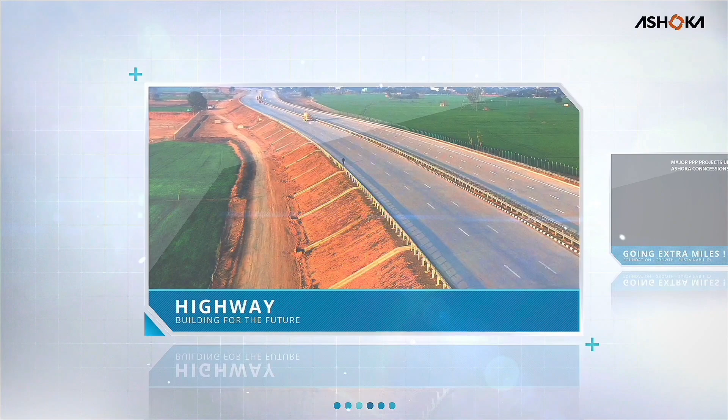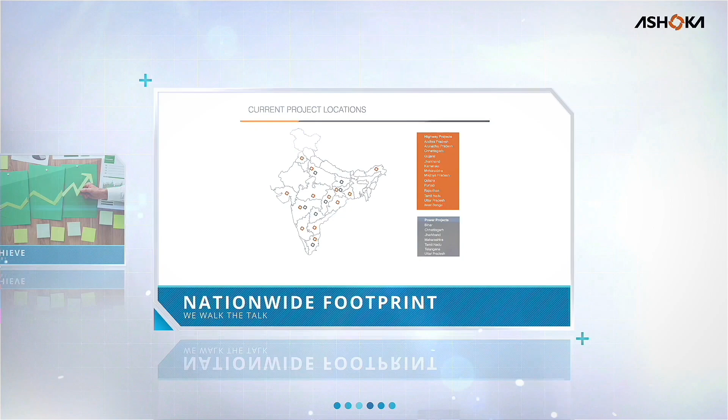Welcome to the world of Ashoka Buildcon Limited, one of the leading highway developers in India. We have a portfolio of 36 PPP projects, which is the largest in number by any private player in India. We have worked in over 19 states across the country and completed prestigious projects for central as well as state governments.

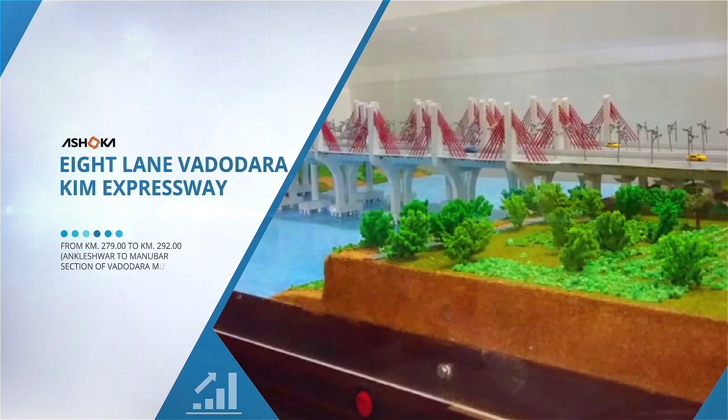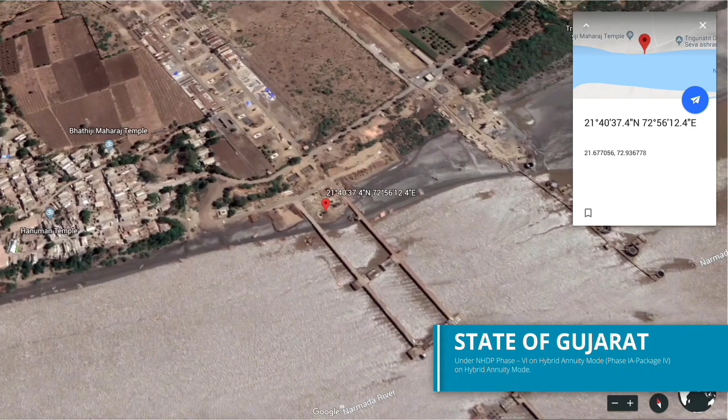Delivery excellence is in our DNA, and to endeavor the same, we are here yet again to undertake the construction of 8-lane Vadodara-Kim Expressway in the state of Gujarat under NHDP Phase 6 on Hybrid Annuity Mode, Package 4, including the iconic 8-lane Extradose bridge over River Narmada.

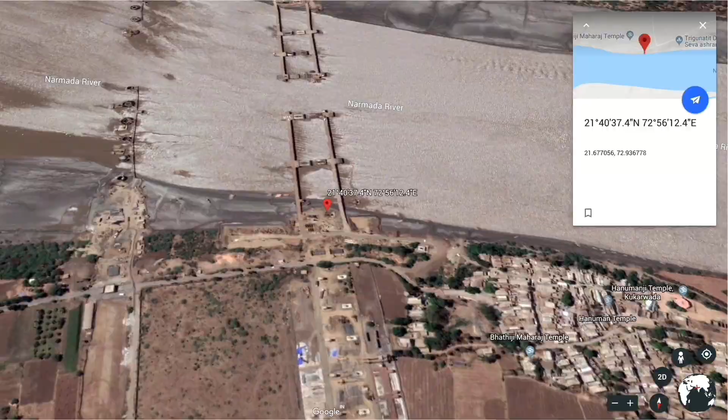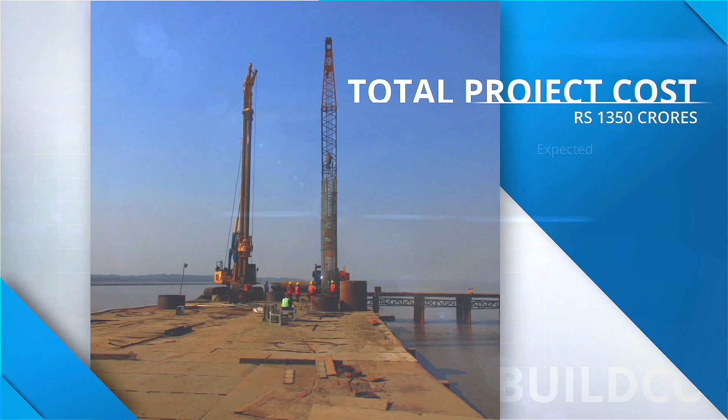This shall be India's first 8-lane Extradose bridge and is being targeted to be completed in a record time of 27 months. Out of the total project cost of Rs 1,350 crores, the bridge is being constructed with an expected expenditure of Rs 750 crore. The bridge has been designed to ensure that all navigational requirements are fulfilled.

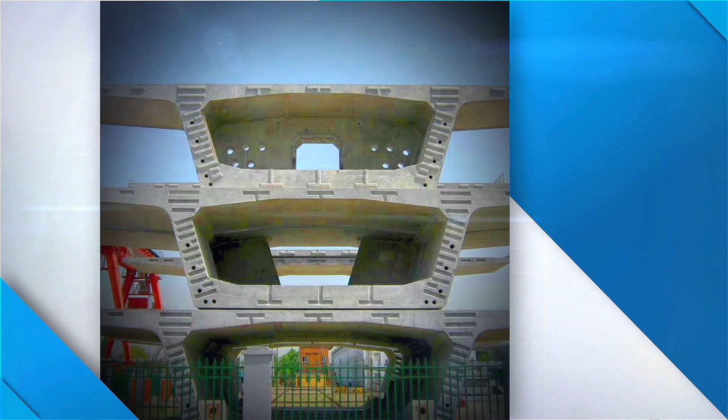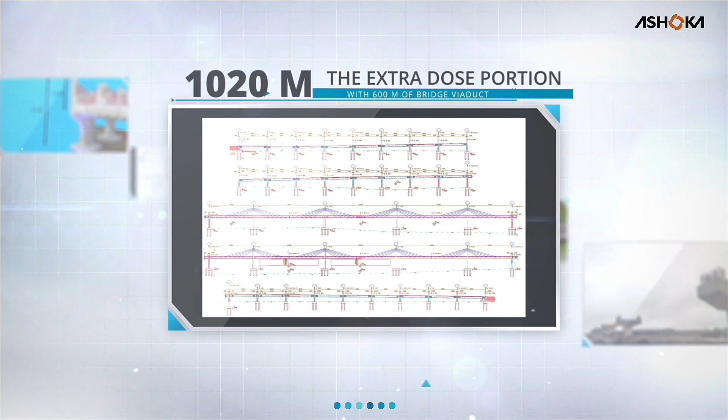This 8-lane bridge is 2.2 km long, which is being constructed using segmental box girder technology. 2 carriageways of 4 lanes each have been envisaged with a deck width of 21.25 meter each. The Extradosed portion of the bridge is 1020 meter long with 600 meter of bridge viaduct on each side of the Extradose portion. The Extradose portion bridge consists of 2 modules with a length of 510 meters each.

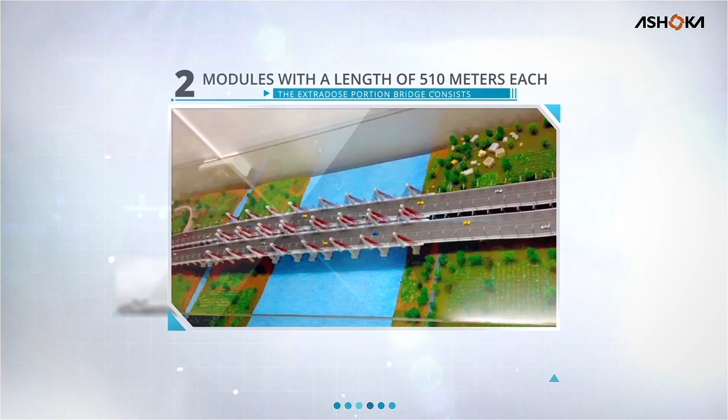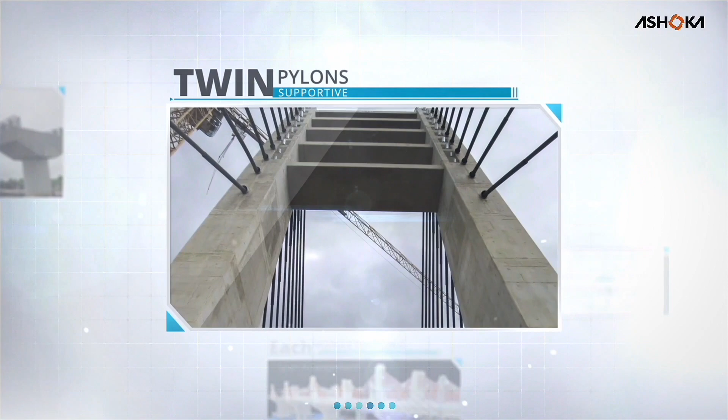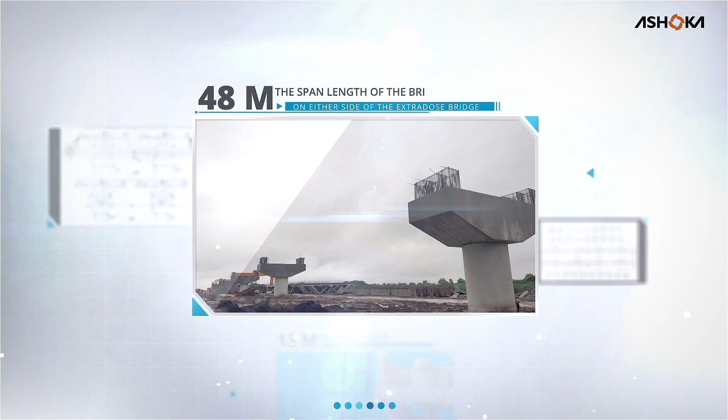The span arrangement of each module portion is 1/75 plus 3/120 plus 1/75 and shall be supported on twin pylons. There shall be 16 such twin pylon piers, each with a height of 13 meters from deck level and 33 meters from ground level. The span length of the bridge viaduct on either side of the Extradose bridge is 48 meters.

The project work was commenced in December 2018 and the mobilization activities started at breakneck speed immediately thereafter. Land acquisition for temporary and permanent works was done at a frantic pace with the support of NHAI PIU. Ashoka Buildcon has done capex of around Rs 250 crores in this mega project. It has brought in brand new equipment of more than Rs 150 crore on this project.

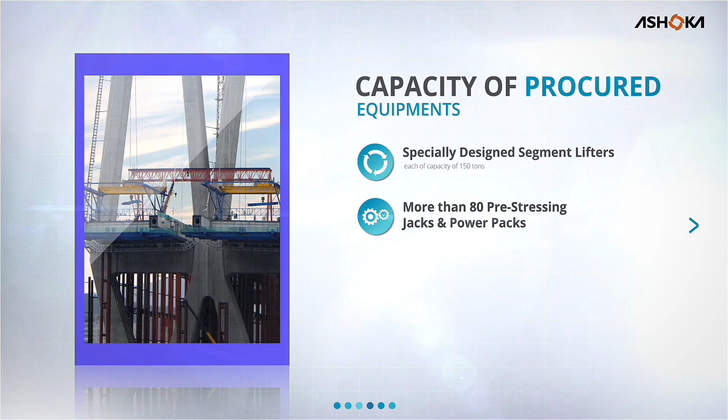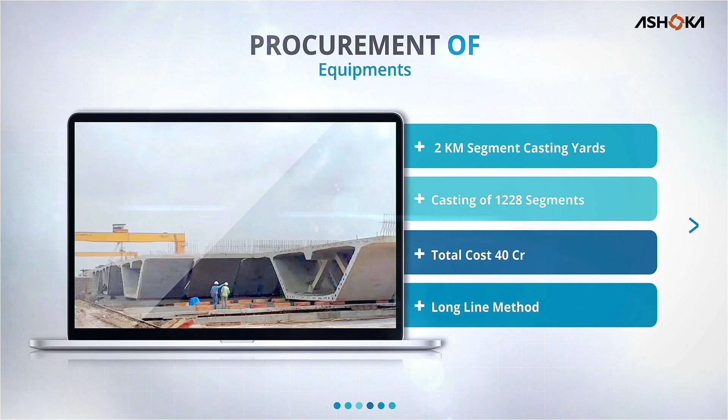This includes 11 gantry cranes, 2 launching girders, 3 vibro hammers and 8 pairs of specially designed segment lifters, each of capacity of 150 tons, more than 80 pre-stressing jacks and power packs. Other than this, 4 casting yards with a cumulative length of 2 km have been commissioned at a cost of Rs 40 crore for casting of 1228 segments using the long line method.

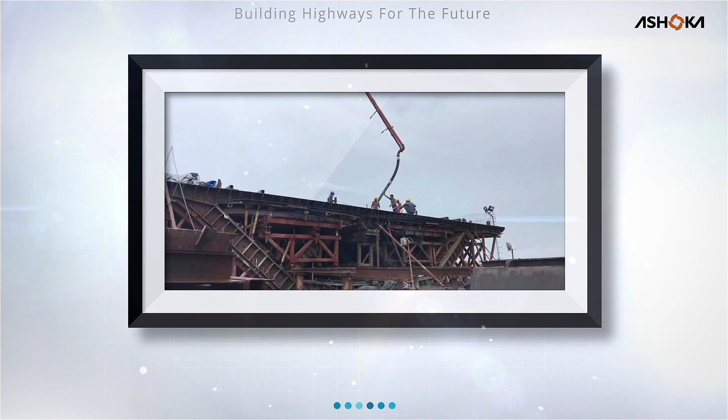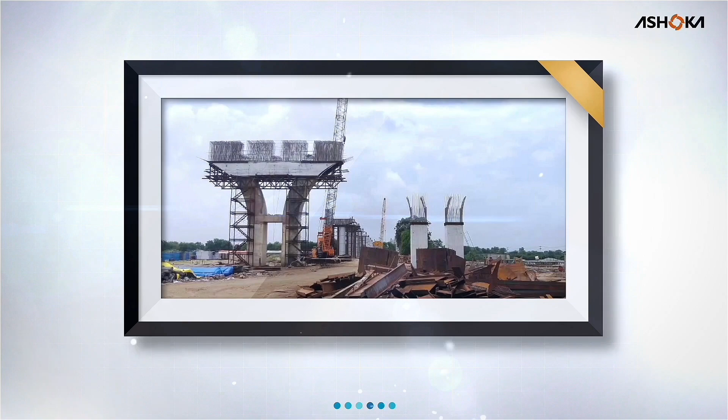Ashoka Buildcon has mobilized more than 14,000 MT of structural steel worth Rs 55 crores for temporary and auxiliary works, in addition to the overall project requirement of 30,000 MT of reinforcement and 700 MT of Extradosed cables, which are imported from Germany. The total concrete of only the bridge portion is more than 168,000 cubic meters.

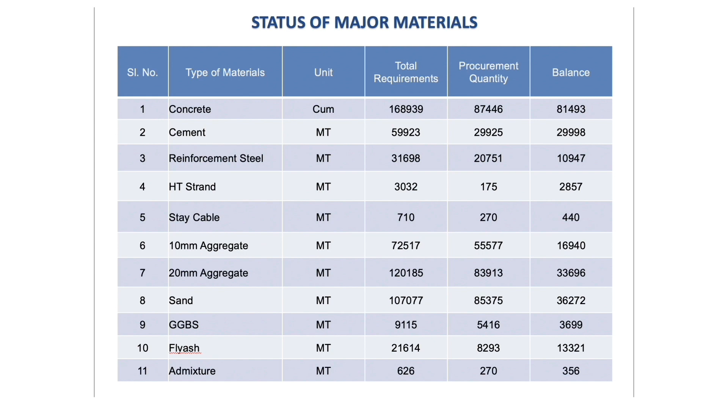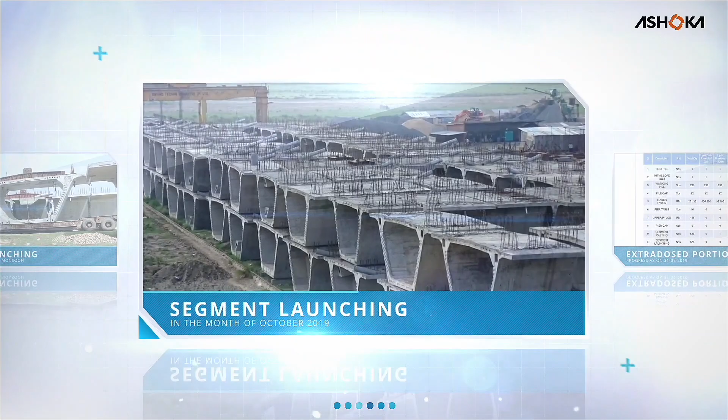In the bridge viaduct portion, piling was completed in all respects in a period of 4 months and as on date, 90% of pier cap is completed. The segment launching works are expected to commence post-monsoon in the month of October 2019. The Extradosed portion of the bridge is a highly technical, challenging and complex part of the project.

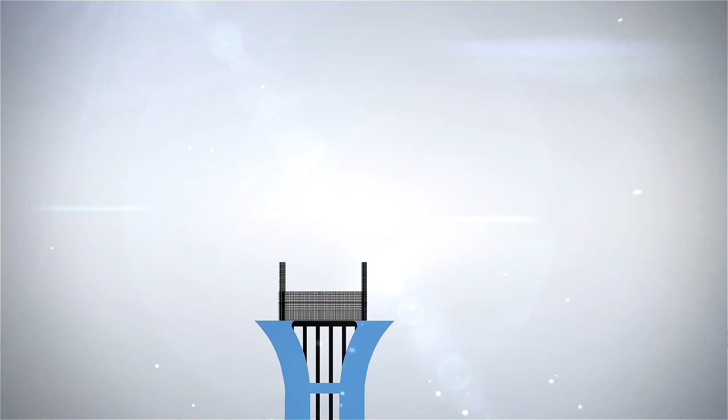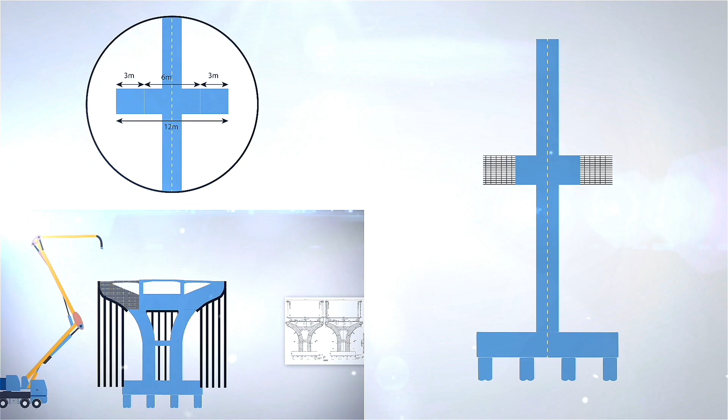After completion of pile cap in the river portion, the lower pylon casting is completed in 6 stages. The final lift of 2.3 meter projects the reinforcement of the cast-in-situ pier table. The length of the pier table in the longitudinal direction is 12 meter, out of which 3 meters on either side of the central line shall be cast and thereafter the balance 6 meter shall be cast.

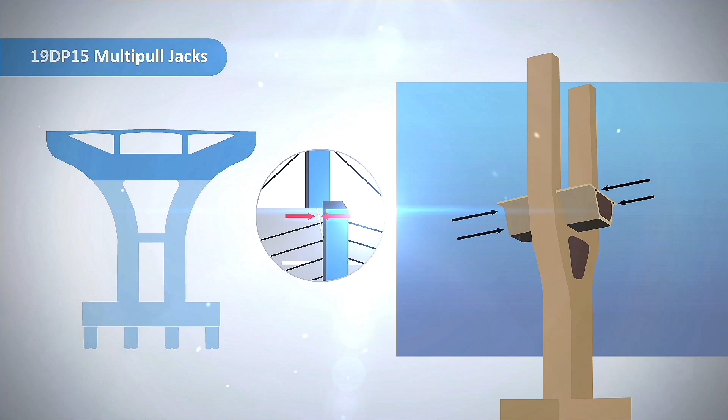The pier table shall be stressed in transverse direction using 19 DP 15 multipull jacks of capacity of more than 500 T. Once the main 6M segment of cast-in-situ pier table achieves a strength of 50 MPa, a tower crane of height 24 meter is erected to enable the construction of the upper pylon.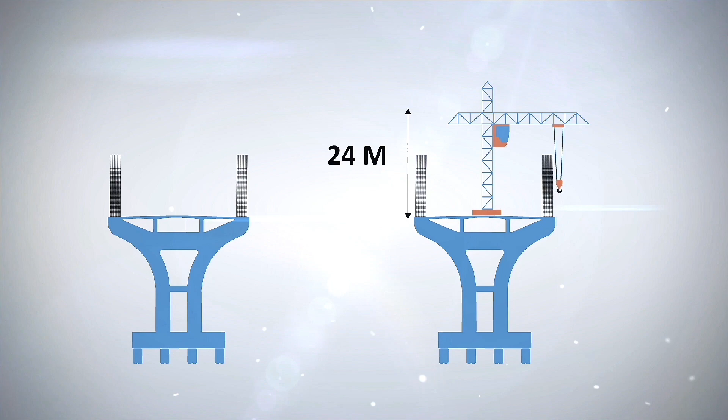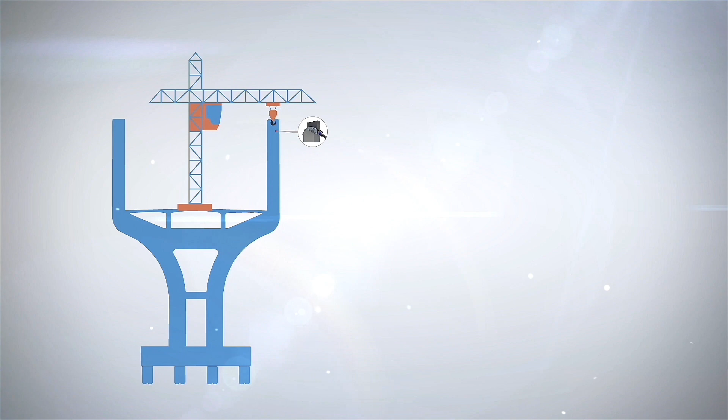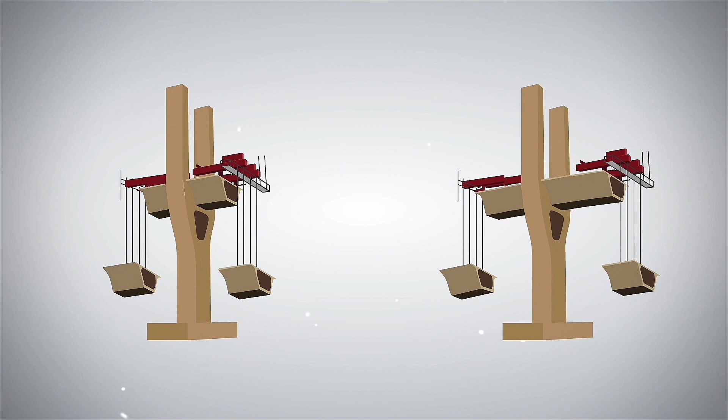Each of the 4 upper pylons are 24 meter in height and shall be cast in 6 lifts. In each lift, a DYNA Link is fixed with precision so as to match the profile of the extradosed cables. After completion of the upper pylon, the tower crane is dismantled and arrangement is made for the erection of the segment lifters. Each set of segment lifter weighs about 60 tons and is erected in parts using a hydraulic crane of 75T.

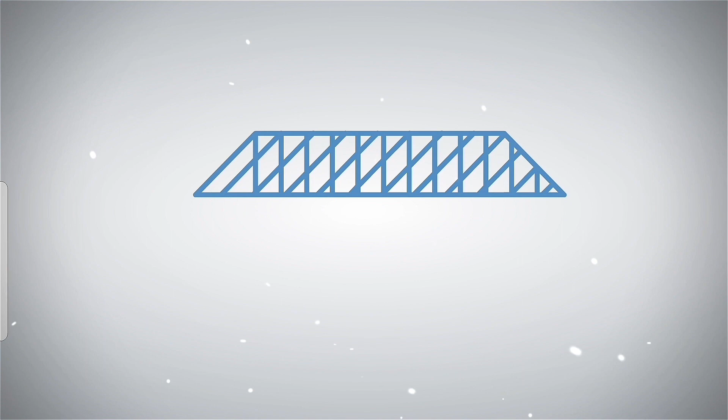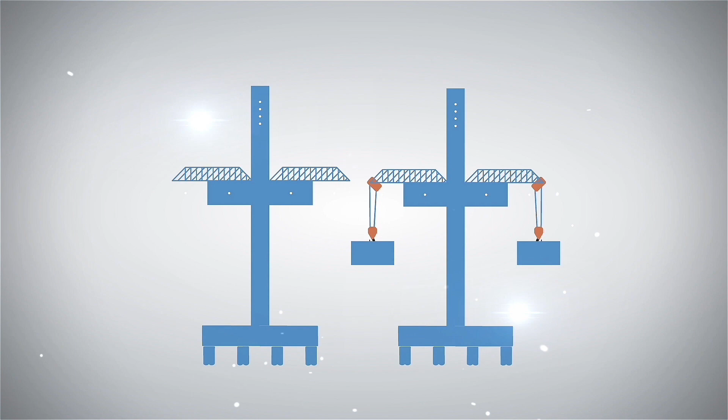Once the segment lifter is erected and commissioned, the segment is placed directly under the segment lifter. The segment is then lifted and positioned simultaneously by both lifters and stressing is done from both ends. Thereafter the segment is released and the lifter is moved in position for the next segment launching. This cycle is repeated for the entire module. The overall time completion of the entire project is dependent on the early completion of the extradosed portion.

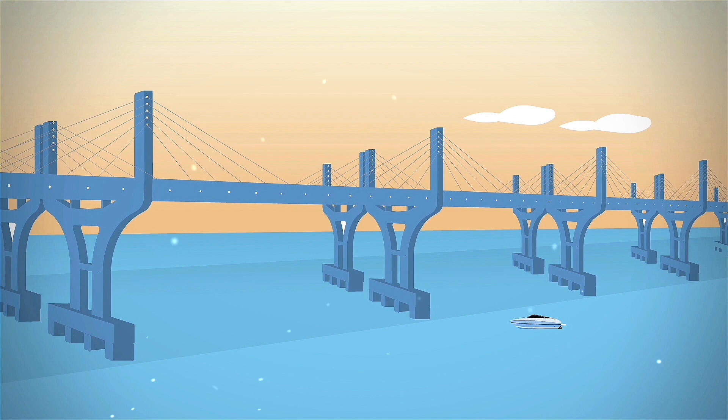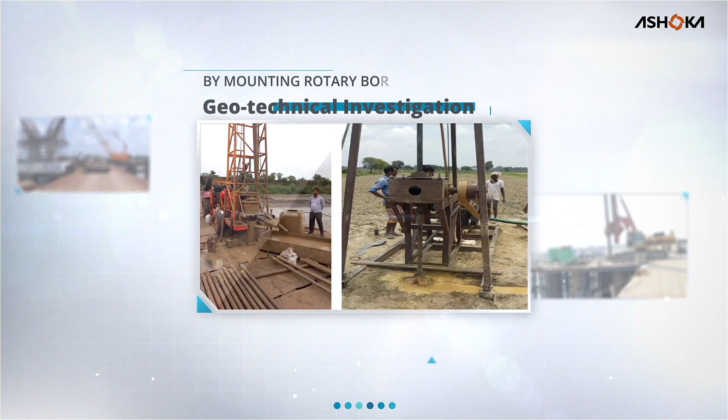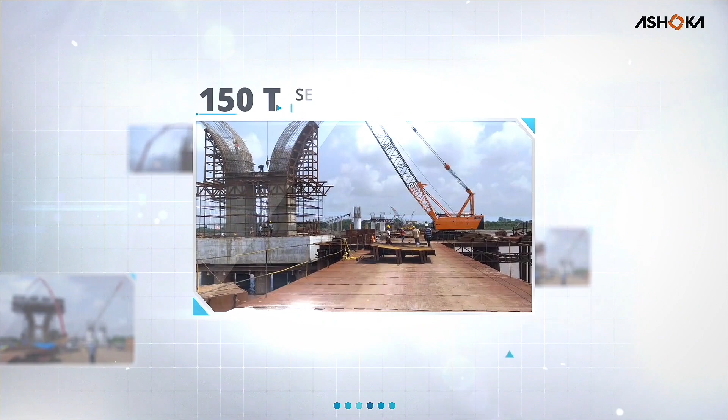In the extradosed bridge portion, the geotechnical investigation was done by mounting rotary bore machines on a specially designed barge arrangement in the river portion, and simultaneously work was begun to construct a 600-meter temporary bridge designed to safely carry a 150T segment. 5 high-capacity hydraulic piling rigs with more than 65-meter kelly length were mobilized to carry out the piling works.

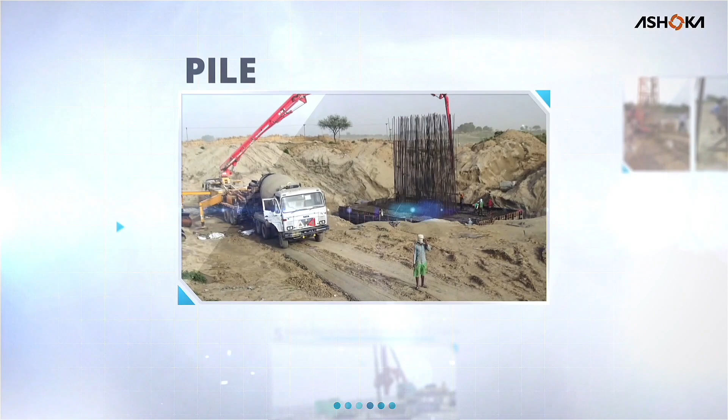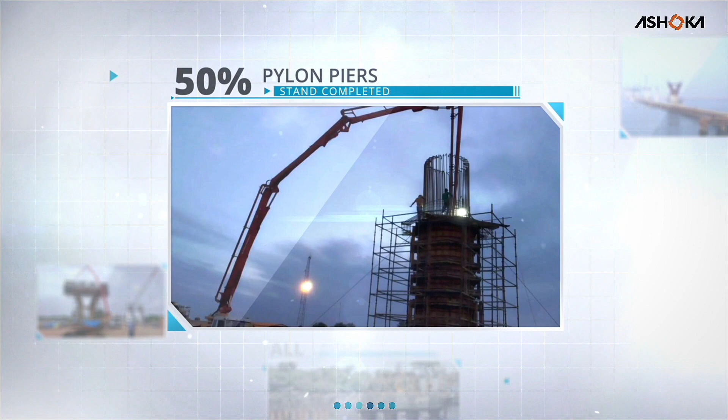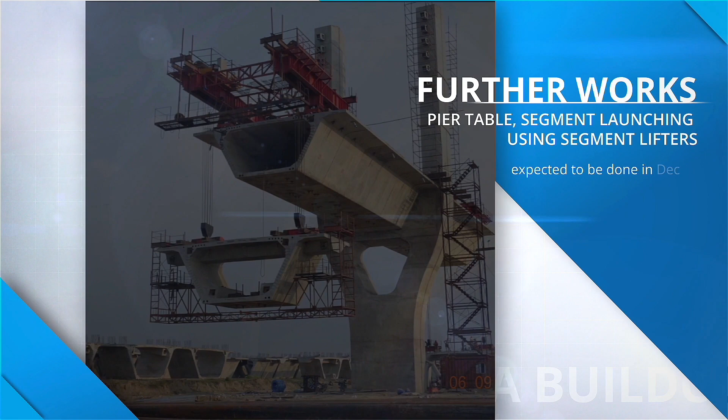The pile cap work was carried out in a phased manner owing to tidal variations of more than 5 meters. As on date, all pile caps have been completed and more than 50% of pylon piers stand completed. The lower pylon of the extradosed portion is now being taken up at a fast pace, and further works of pier table segment launching using segment lifters are expected to be done in December 2019. We have taken up the enormous challenge to deliver this project in record time. Thank you.